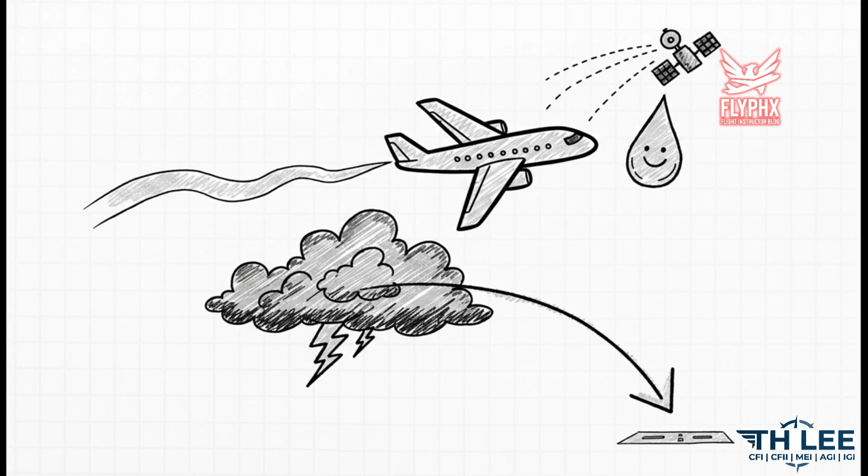Okay, let's dive into this. Have you ever wondered why airliners bother climbing all the way up there? I mean, it's not just for the spectacular views, right? Flying high comes with some massive advantages. First off, the air density drops, which means less drag on your aircraft. Less drag gives you a higher true airspeed and a huge drop in fuel consumption. Plus, you get to cruise right over heavy rain and nasty turbulence for a buttery smooth ride.

And heaven forbid you have an engine failure. Being up that high gives you way more time to troubleshoot and a much longer emergency glide distance to reach a runway. Oh, and your VOR and GPS signals, crystal clear. So yeah, climbing up into the thin air is totally worth it.

Here's our flight plan for today. We're going to cover 6 main waypoints: high-altitude characteristics and risks, essential oxygen equipment rules, oxygen supply system types, aircraft pressurization principles, understanding decompression, and finally, turbochargers versus superchargers. Get your notepads ready, seriously, because this exact structure is going to carry you straight through the exam material.

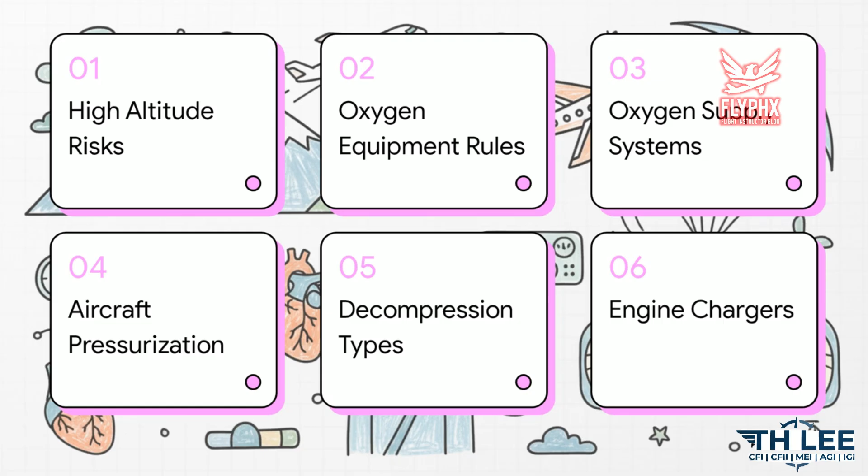Let's go. Section 1. High-altitude characteristics and risks. Now, high-altitude flying isn't just about beautiful sunsets and smooth air. It comes with some pretty serious, invisible physical hazards. And the biggest danger up there isn't something you can see. It's the simple fact that you just can't breathe.

And this brilliantly illustrates the core of the problem. A lot of people think there's less oxygen up high, but actually the 21% oxygen ratio in the atmosphere doesn't change at all. What does change is the pressure. At sea level, you've got 14.7 psi of atmospheric pressure, literally shoving that oxygen into your lungs. But by the time you reach 18,000 feet, that pressure drops in half to just 7.34 psi. Without that pressure, your lungs just can't force the oxygen into your bloodstream, which leads straight into a very dangerous condition called hypoxic hypoxia.

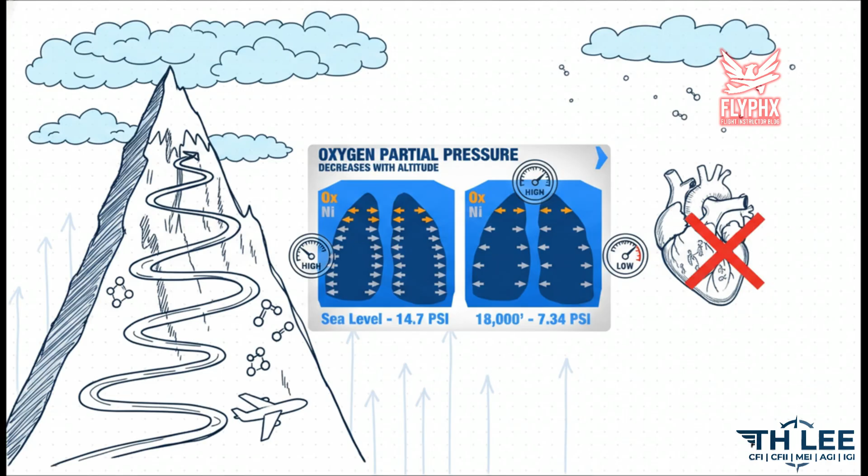All right, pens out, everybody. You'll want to explicitly take notes or screenshot this chart right here. This is your time of useful consciousness, or TUC. It measures how long you can actually function, make smart decisions, and do your job as a pilot without supplemental oxygen. Just look at how fast your brain checks out as you climb.

At 20,000 feet, you've got about 30 minutes. Not too bad, right? But push it to 30,000 feet and you literally have 1 to 2 minutes. And at 45,000 feet, you've got a terrifying 9 to 15 seconds. Hypoxia slows your reaction time, blurs your vision, and completely wrecks your judgment before you even realize what's happening.

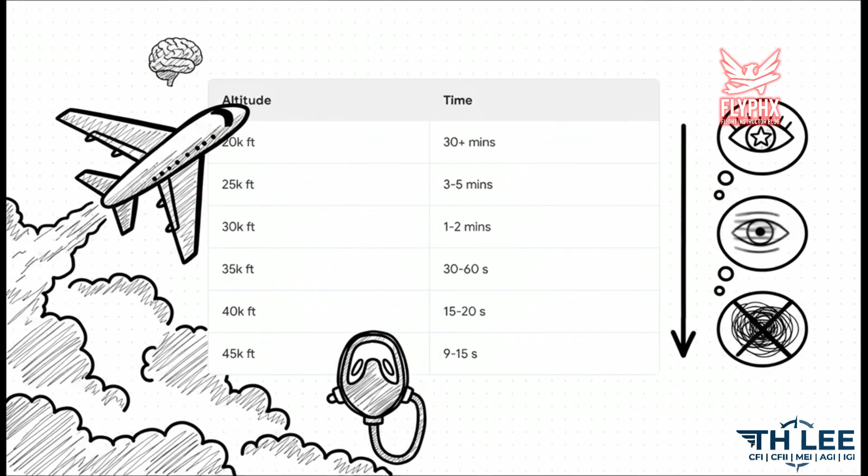Section 2, Essential Oxygen Equipment Rules. Because of those scary biological facts we just talked about, the FAA doesn't mess around here. These regulations are strict, they are literally written in blood from past accidents, and I promise you, they are a guaranteed topic on your exam. Okay, this is the most confusing part of FAR 91.211, so let's walk through it row by row.

Write these numbers down. For unpressurized aircraft, if you're flying above 12,500 feet up to 14,000 feet and you're there for more than 30 minutes, the required flight crew must use oxygen. Push above 14,000 feet, the crew needs oxygen for the entire time, period. Go above 15,000 feet, and now everyone on board, including passengers, must be provided with oxygen.

Now what about pressurized planes? Above flight level 250, you must have a 10-minute supply of oxygen for every single occupant in case of an emergency descent. Above flight level 350, at least one pilot at the controls must wear a sealed oxygen mask.

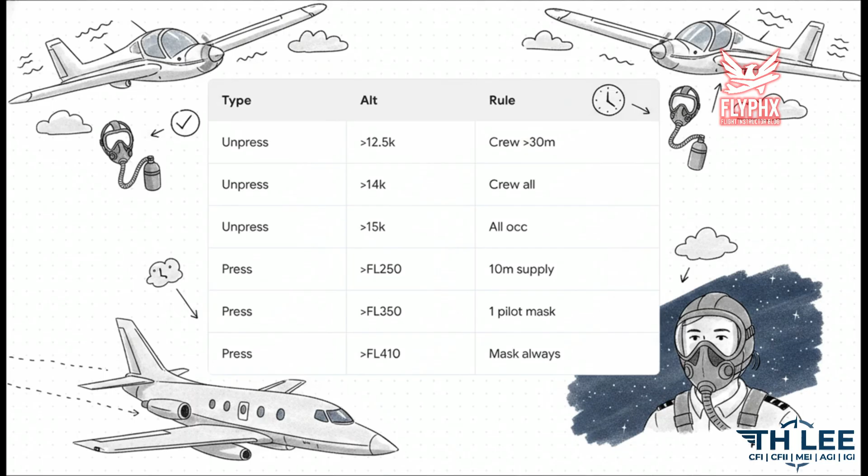There is a catch though. You can skip wearing it if both pilots have quick-don masks that can be put on in under 5 seconds with one hand. But cross above flight level 410 and that exception vanishes. One pilot must wear the mask at all times, no matter what. Make sure you've got those memorized.

Section 3, Oxygen Supply System Types. All right, so we know the strict rules. Now we need to know about the actual gear that keeps us breathing and alive up in that freezing, thin air. First up is the continuous flow oxygen system. You've probably seen these. They're the simple masks with the little rebreather bag that drop from the ceiling for passengers.

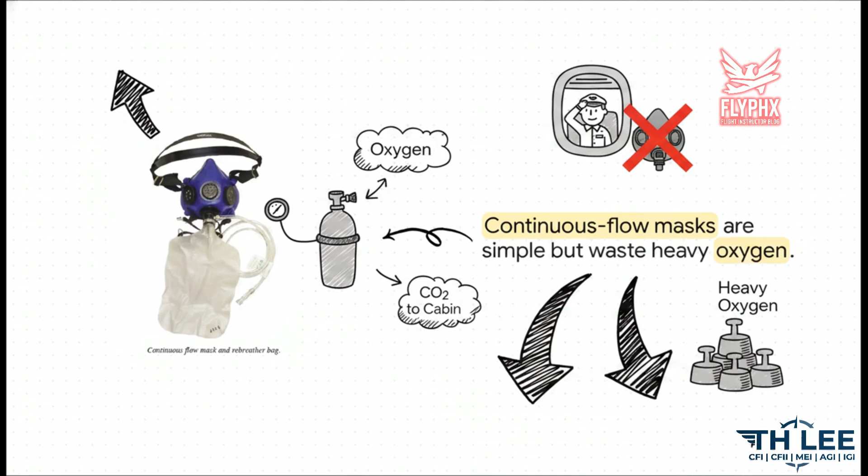It does exactly what it sounds like. It pumps a continuous flow of oxygen into the bag. You breathe in the good stuff and breathe out carbon dioxide into the cabin. Now, this is a great, foolproof system for keeping passengers alive during a rapid descent. But for pilots, it's terrible. It wastes a massive amount of heavy, precious oxygen because it just keeps flowing out even while you're exhaling. Next, we have the cannula system.

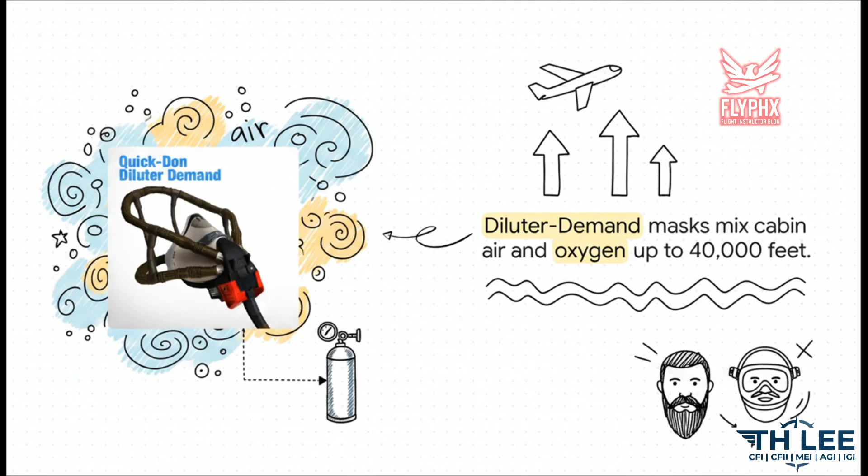Once you cross 18,000 feet, you need to step up to a diluter demand system. This is a much smarter, tightly sealed mask that works safely up to 40,000 feet. It saves oxygen by only supplying it when you actively inhale. Plus, it automatically dilutes or mixes 100% pure oxygen with cabin air based on your altitude, giving you the perfect ratio. Oh, and a quick pro tip for you future captains: trim your beards. If you have facial hair, you literally cannot get a proper airtight seal with this mask, which defeats the whole purpose.

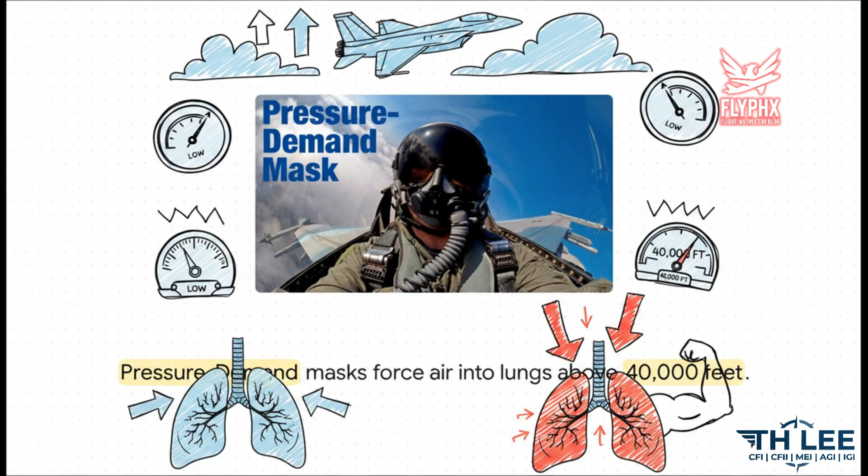Now, if you're soaring above 40,000 feet, the atmospheric pressure is so incredibly low that even breathing 100% pure oxygen isn't enough to keep your blood saturated. You need the pressure demand mask. This beast literally forcefully pushes oxygen into your lungs. But here's the crazy part. Because the machine is doing the work of inflating your lungs, you have to use your own muscle power to force the air back out. Exhaling becomes incredibly exhausting over long periods. It's literally a full-body workout just to breathe.

Before we move on, let's quickly talk about where all this air comes from: the high-pressure oxygen storage cylinder. This aviation-grade oxygen is compressed to a staggering 1,800 to 2,200 psi, and it's 100% pure, moisture-free to prevent lines from freezing. During your pre-flight, check these carefully. Keep them away from extreme temps, and guys, absolutely no lighters or open flames anywhere near 100% pure aviation oxygen. The fire hazard is off the charts.

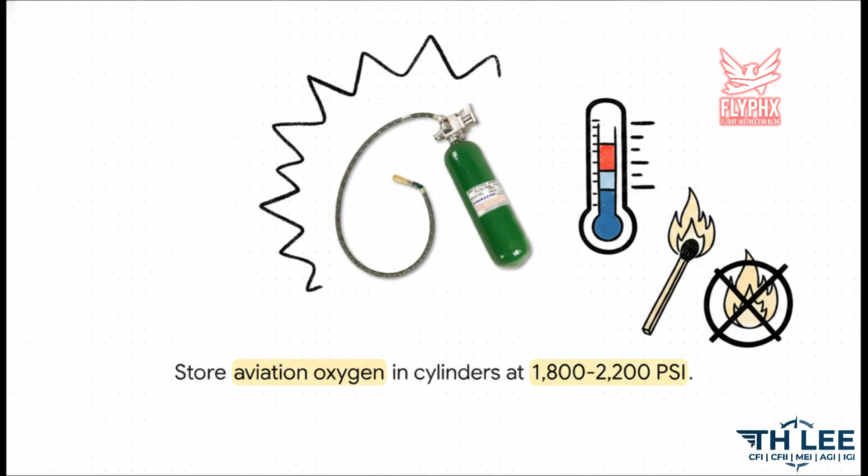Section 4. Aircraft pressurization principles. Okay, let's pivot away from rubber masks to the ultimate luxury and safety feature: pressurization. Instead of strapping gear to our faces, why not just bring the comfortable, low-altitude environment up with us? Let's move to the diagram and see how this builds. In a turbine engine, we tap into the compressor section and steal some of what's called bleed air. Now, this air is under immense pressure and is super hot, so we route it through a heat exchanger to cool it down and then pump it straight into the sealed fuselage.

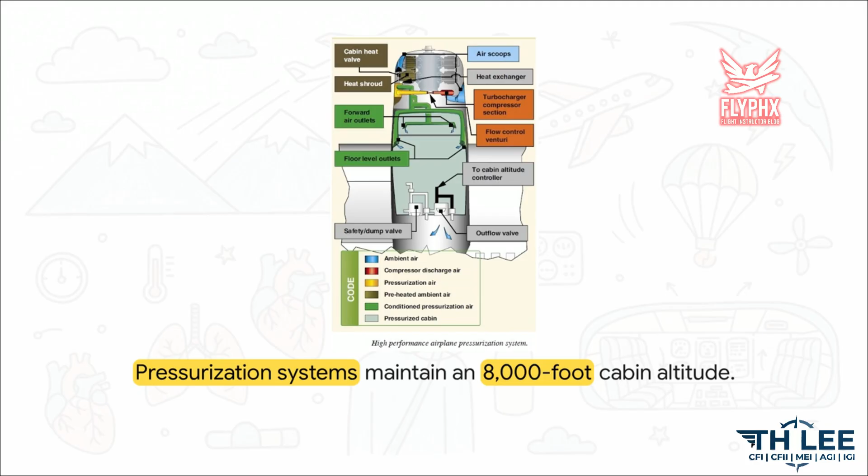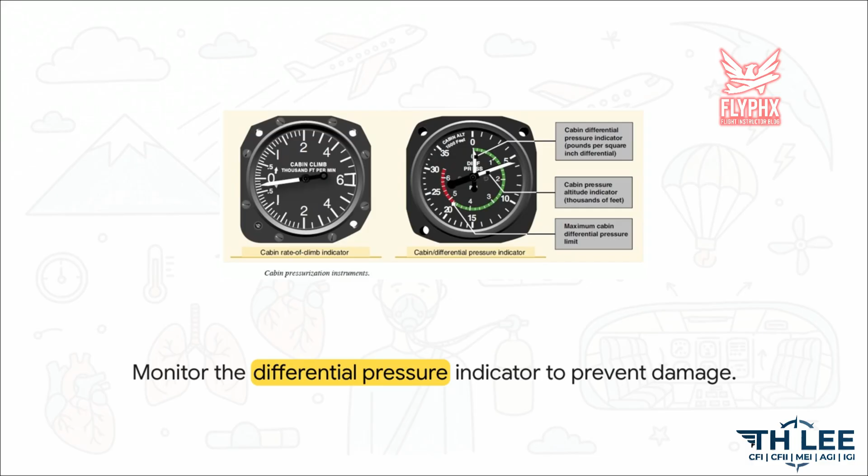By continuously pumping air in and regulating how much leaks out, we can maintain a cabin pressure equivalent to about 8,000 feet, even when we're cruising at 35,000 feet. No masks needed and no painful ear popping. But holding that much pressure inside a thin metal tube surrounded by near vacuum conditions puts a massive amount of stress on the aircraft. Direct your attention to the cabin differential pressure indicator. This gauge shows the difference between the inside cabin pressure and the outside atmospheric pressure. As a pilot, you must monitor this constantly. If that differential gets too high, the airplane acts like an overinflated balloon, and you risk causing catastrophic structural damage to the fuselage.

Section 5. Understanding decompression. So we've built this wonderful pressurized safety bubble. But what happens if that bubble pops? Let's shift gears to emergency procedures, because losing your cabin pressure is a very serious, very realistic threat. Decompression comes in 3 flavors, depending on how fast it happens. First is gradual decompression. This is sneaky, maybe a faulty door seal or a tiny crack. It's so slow you won't physically notice it, which is why monitoring your gauges is absolutely crucial.

Second is rapid decompression. The cabin loses pressure fast, but crucially, your lungs empty faster than the cabin does, so your lungs are safe from physical tearing, but your useful consciousness is dropping like a rock. Finally, explosive decompression. This happens in under half a second. The cabin pressure drops faster than your lungs can exhale, which can cause severe, trauma-level lung damage. If you ever hear a loud bang, see the cabin fill with fog, and debris starts flying, remember the golden rule. Secure your own oxygen mask first before you even touch the controls to start your rapid descent. You're no good to your passengers if you're passed out.

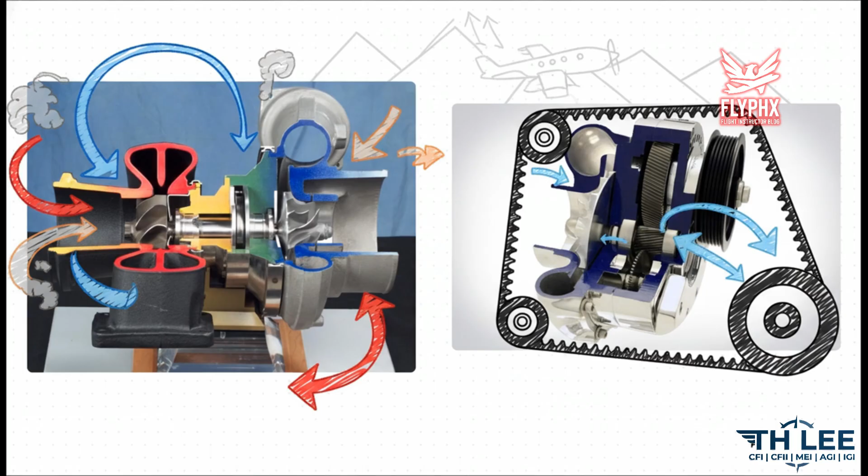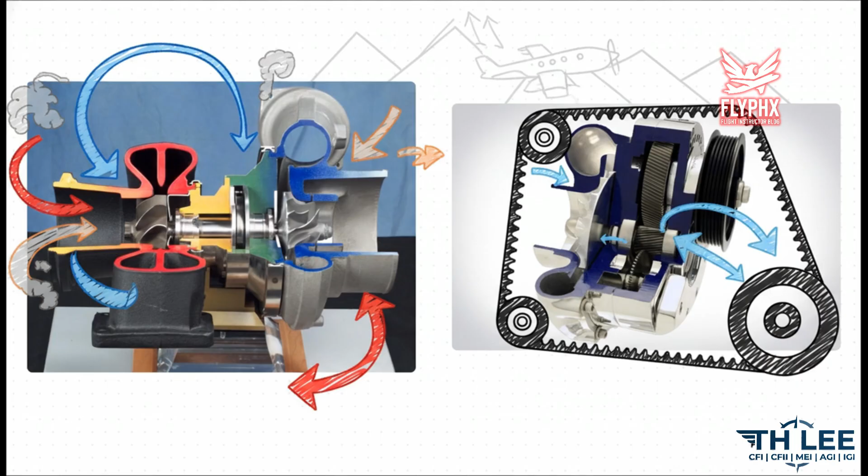Section 6. Turbochargers versus superchargers. Let's transition to our final technical topic. Just like our human lungs, piston engines need dense air to perform. So, how do we force feed a piston engine up in the thin atmosphere? Let's look at chargers. Check out these awesome cutaway visuals side by side. They both do the exact same job, compressing intake air before it goes into the engine, but they do it in completely different ways. On the left, the turbocharger uses the hot, wasted exhaust gas blowing out of the engine to spin a turbine, which then drives a compressor. On the right, the supercharger doesn't care about exhaust. Instead, it is physically bolted to the engine and driven by a belt or pulley connected straight to the crankshaft.

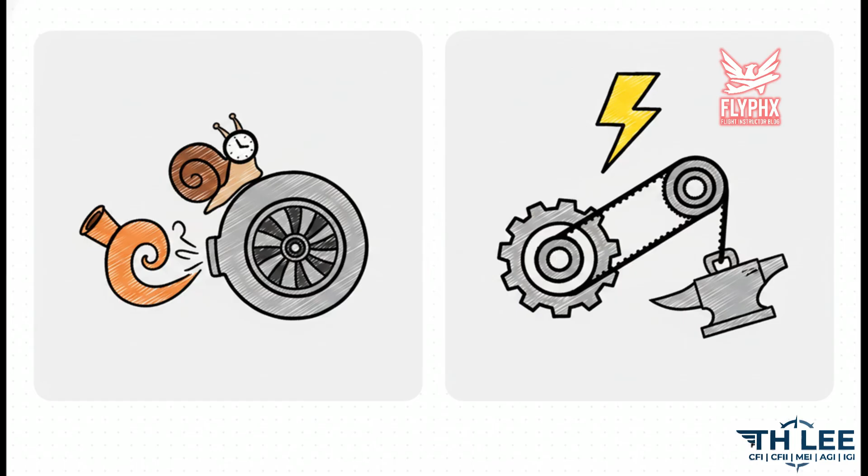So, the crucial point is understanding the trade-offs here, because you will definitely need to compare these on your exam. A turbocharger is incredibly efficient because it's recycling free wasted exhaust gas. But because it relies on exhaust buildup when you shove the throttle forward, there's a delay before you get the power. We call that turbo lag. A supercharger, on the other hand, is directly connected to the engine block. You push the throttle, you get instant power, zero lag. But what's the catch? It literally steals horsepower from the engine just to run its own belt, making it far less efficient overall.

Wow, okay, we've covered a massive amount of ground today. From the creeping dangers of hypoxia all the way to the mechanical guts of a turbocharger. So here's a question to chew on. Between the various oxygen mask systems and the cabin pressurization mechanics we covered today, what will be your most trusted safety net on your very first high-altitude flight? Think about it, and please make sure you review the notes you took today.